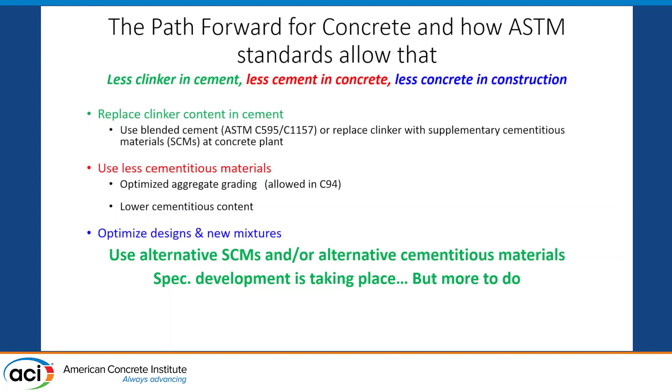We're getting a lot more companies, such as these new development companies. At the last ASTM meeting in June in Denver, we had at least 6 startup companies show up saying, how can we get into the ASTM process? Some of them are producing alternative cements, some are producing supplementary cementitious materials, some of them maybe both. So we're working on a strategy at ASTM to see how we can help get these people started in the ASTM process of getting specifications move forward.

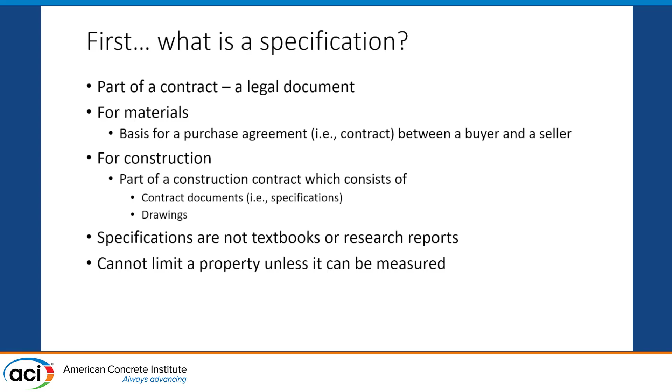But first, what is a spec? A specification is part of a contract. It's a legal document, a purchaser agreement between the supplier and the purchaser of that product. And for materials, the basis is a purchase agreement. For construction, typically specifications are part of a contract document for allowed construction. Specifications are not textbooks or research reports. They're a contract document for purchase. And you can't limit a property unless it can be measured.

So we talk about performance and prescription. And one of the things we're doing is trying to move towards more performance-based specifications for materials. That's why I've got this slide up there. Traditionally, a lot of the specifications have been prescriptive, so it has to be these materials and these proportions, as opposed to what are you trying to get out of the product? What are your performance parameters?

Now, often they're a mix. If you look at ASTM C150, there's setting time requirements, strength requirements, but there's also compositional limits, for example. And it implies that all materials that meet those minimum limits in the standard are the same when they're prescriptive. So if we don't put the compositional limits in and we just specify performance, we can open up the doors a bit. We have a performance specification for hydraulic cements, C1157.

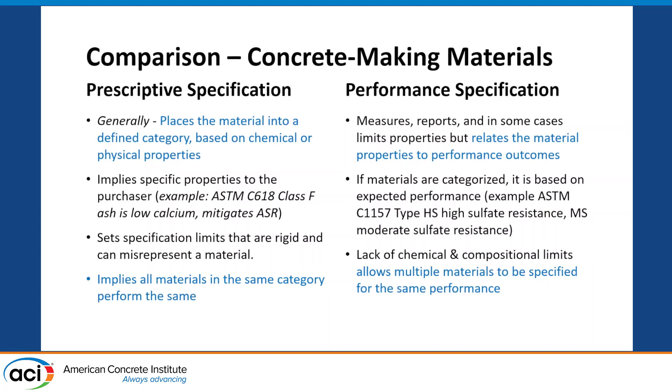It's been there since 1992. I think there's less than 5 states that have adopted it in the last 30 years. Because for some reason, people like to talk about performance, but they don't trust performance. Or they want to be the cooks in the kitchen, tell you how to make it as well.

But as we move, just remember that if people think standards development is slow, it's a consensus-based process. It's not the same as many other parts of the world where you don't have consensus processes. So you've got many people coming from different viewpoints, and they all have to come together to agree on something together.

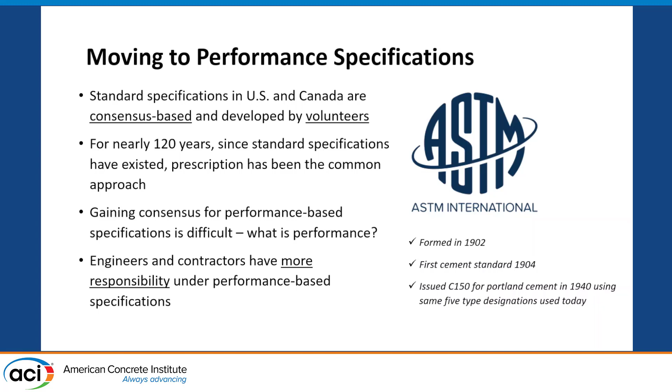And it changes roles and responsibility performance towards the engineering team. So they have to know what performance they're looking for, and often people haven't thought that through in detail. So we can meet a lot of the 2030 goals for reduction in global warming potential by just doing things that are allowed now in the standard. Without making any changes whatsoever, we can do these things.

We have Portland limestone cements with up to 15% ground limestone that offer about a 10% reduction in CO2 just by utilizing them.

They were intended to be equal performance to the base clinker for the type 1-2 cement they were replacing, not equal performance to every other cement. They were supposed to be equal in performance to the cement from the same clinker from the same factory.

So if you're going to buy cement, some issues have been evolving with Portland limestone cement, which seems unique to certain parts of this country and not others, where people are buying from multiple sources. It may not be that there are issues, but in Canada we've been using Portland limestone cements, and we're at 100% now. There was never any issue with adopting and using them.

So that's a 10% reduction. You can also increase the level of SCMs. Fly ashes and slags have been used for years, but typically at lower replacement levels. A lot of DOTs limit the maximum SCM level to amounts that don't allow you to optimize and reduce further, but you're getting a direct reduction in proportion to what you're replacing with the clinker.

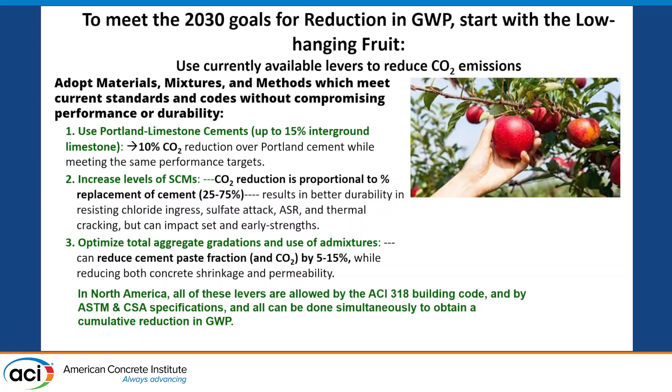For example, C595, the blended cement spec, is where the type 1L cements ended up. There's also a type 1T, which is limestone plus an SCM such as fly ash or slag, allowing you to blend these materials. And as I said, C94 allows optimized aggregate gradations.

Last month, apparently, Portland limestone cement is now 54% of U.S. production of cement type. And right now, in certain parts of Ontario, I can't speak for all of Canada, it's 100%.

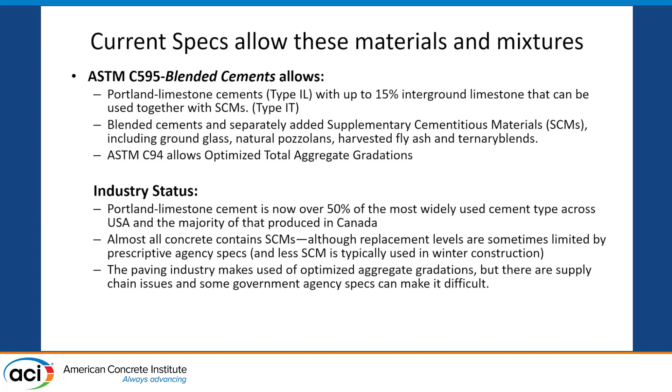All concrete contains SCMs pretty much, but as I said, some are restricted by prescriptive agency specifications, which are often legacy type specifications. And not many people do the aggregate optimization, even though it's fairly easy. This is a cartoon from the Cement Association of Canada report, showing that just using a limestone cement with either a moderate amount of fly ash or slag, you can get down into the 50% reduction range.

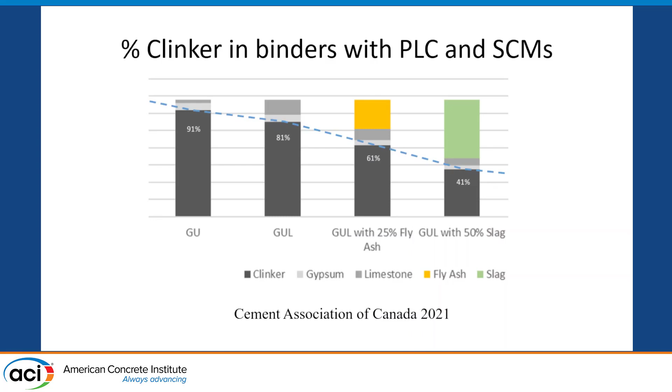Now Mary mentioned this earlier: what's the availability of materials? This is something Karen Scrivener at EPFL has been pushing, that on a global scale, when we're trying to make an impact, fly ash and slag are relatively small in availability in proportion to the Portland cement being produced. About 50% of that Portland cement is from China.

China seems to have peaked now, but India is growing, and they're probably going to double their cement production in the next decade. Africa is rapidly developing as well. So what's available for these people if we're not going to have more coal-burning power plants, and blast furnaces are being converted into electric arc furnaces, so the amount of blast furnace slag will reduce in availability over time. You can do all these things people talk about, but they're relatively small proportions.

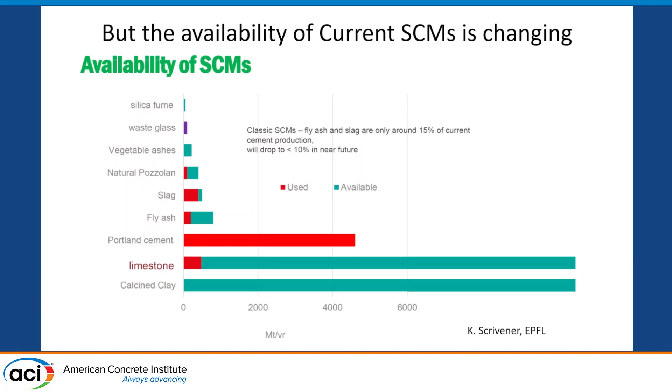So what's available is raw limestone and clay that can be calcined. It doesn't have to be high-quality clay, just calcined and blended together, and you can replace, as Mary showed, 50% of the cement - same graphic she showed - 50% less clinker, about 40% less CO2, just using a different pozzolan. A calcined clay is already allowed and already used in concrete in North America, but typically the high-purity metakaolins. Now there are companies making these lower-grade versions.

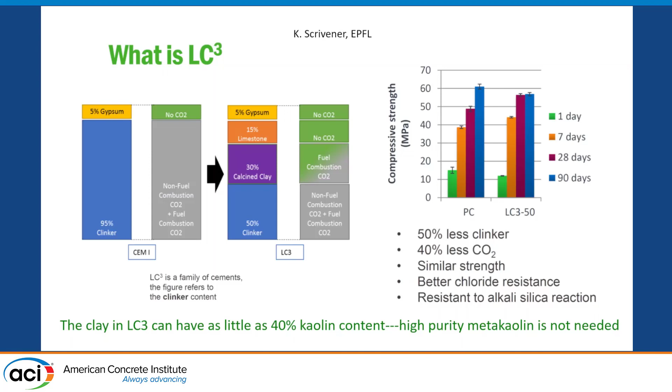I think Ash Grove has a plant now in Nebraska, and I understand that Holcim is doing that in Utah now, calcining clays. And then they can blend that with the limestone cement and make a 1T cement that is allowed now under the standards on 595. You can get similar strength performance, better resistance to ingress, and resistance to other types of degradation mechanisms. And you don't need the high purity material. You can use the stuff that the China clay people in the pharmaceutical industry throw away as waste, as the raw material.

So where are the standards barriers with something like that? Because there's been a lot of play about LC3. Everybody's excited about it. I get calls saying, where can I get some LC3? And the point is right now you can't.

But it's happening fairly quickly in various parts of the world. They seem to have good properties. The availability is good, which is why it's great, especially in the developing part of the world. India and Africa have a lot of clay materials, more clay than limestone. So there's some opportunities there.

Currently, the standards allow cements with up to 15% limestone that can be used together with an SCM. So you could essentially make an LC3 today under the current standards. We wouldn't have to change anything. But while a lot of the DOTs have adopted 1L cements, they haven't adopted 1T cements. They say 595 1L cements, but they don't adopt 595 blanket.

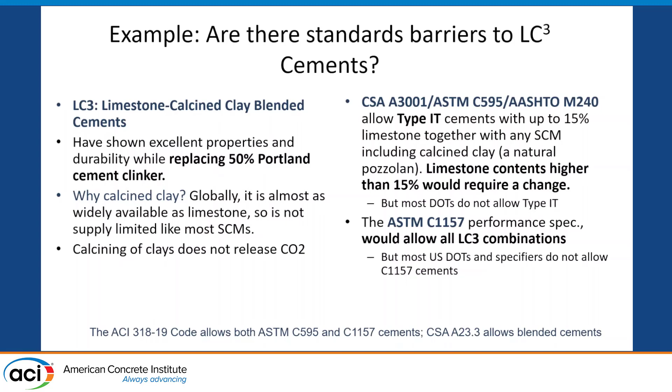Now, the 1157 performance spec, as I've mentioned, been there for the last 30 years, would allow all these things because there's no compositional requirements. You just measure performance, but people aren't speccing it. So there's some limitations there.

So we need to learn how to use performance specifications. We either trust performance or we don't. And this is the 1157 scope.

Performance spec covers hydraulic cements for both general and special applications. There's no restrictions on composition of the cement or its constituents. You just define what's the performance you're looking for, setting time, strength, volume, stability, those things. And you'd think people would use this, but they don't.

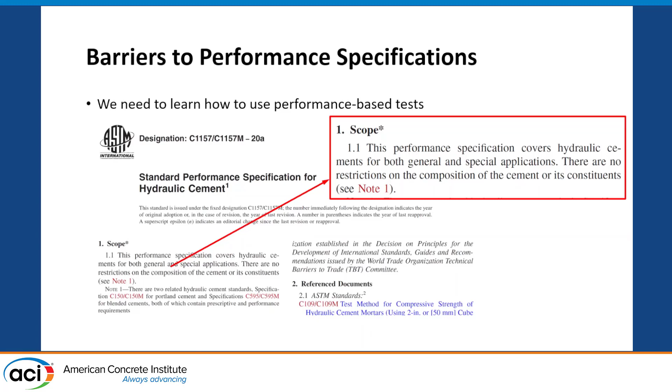As I said, only very few people have adopted it. People want performance, but for some reason they also want to know what's in it. But he's a chef. This guy wants more sand in his mix.

So a lot of the stuff on prescriptive is because of legacy specifications that have been developed over 100 years before the use of SCMs, just based on Portland cement, water, and aggregates. They have not considered the fact that concrete technologies moved on with SCMs and chemical admixtures of various types that can drive performance.

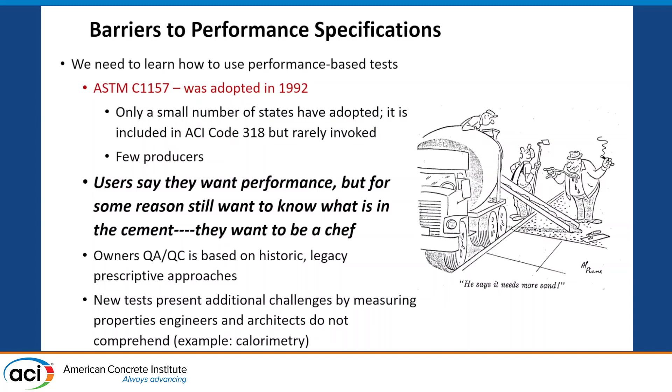So we're developing new tests, but some of the things people don't understand or don't want to take on.

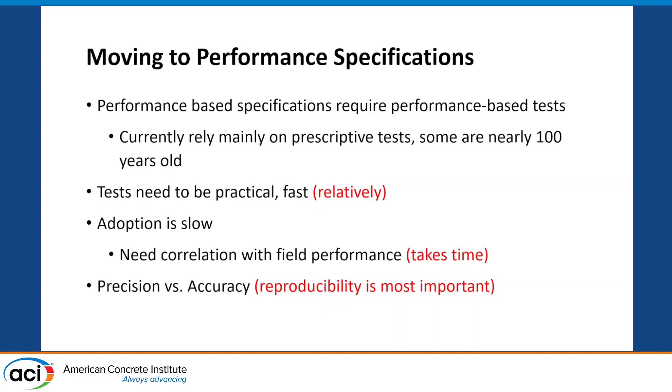Performance specifications require performance tests. Many rely on prescriptive tests. Some are pretty old. Tests need to be practical to be in a spec because you want to do them in a reasonable time frame. And we need to correlate with field performance, as Mary mentioned, and it takes time. And we need reproducibility and accurate test methods.

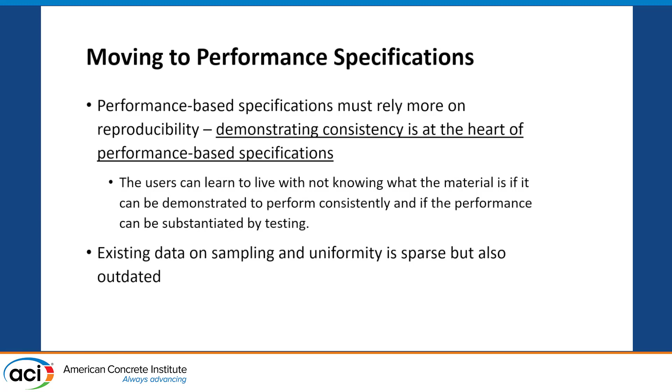So, I mean, I'm playing up to the ASTM part of this story, why it takes some time to do this. And we've got to have consistent product. You can use any product in concrete as long as it doesn't change every day. It's got to be consistent. And so we need some data on consistency.

So we've had some recent successes, though, and Mary mentioned harvested fly ash. I was involved with getting the standard changed in North America, Canada, and the U.S. on allowing harvested coal ash, because the number of coal plants has significantly reduced. But there's almost 2 billion tons of coal ash in landfills around the United States at over 500 sites. Now, some of it's pure fly ash, some of it's intermingled with bottom ash, but it can all be processed. It's exactly the same material.

Now, Mary mentioned that some of it was waste, wasn't used because it was not quality. That's not the case in 90% of the cases. The stuff is, there was just no market for it at the time it was put in the landfill. They were producing more ash than there was a market for.

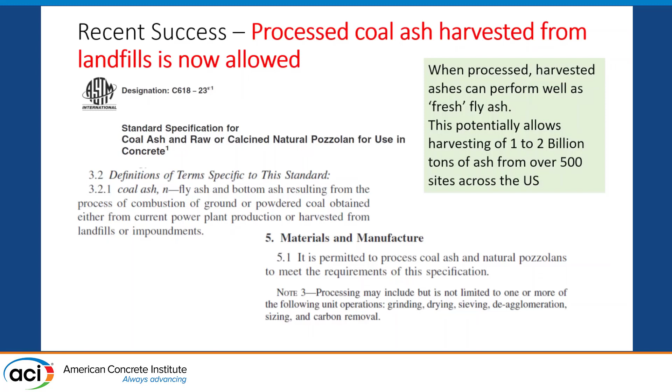So a lot of the stuff in the landfill is actually better quality than a lot of the existing plants are producing now because of the environmental controls that have been put on coal-fired power plants over the last 20 years. Low NOx burners, low SOx requirements, and mercury scrubbing. So a lot of the ash in the landfills is better quality to start with. You just have to get it out of the ground and process it to reduce the moisture and de-agglomerate it. And companies have been doing that, and now the specs allow it. Since June of last year, that's been allowed.

One of the issues with new materials that are coming on the market, alternative SCMs or different SCMs, is what are the reactivity?

How do you tell? A lot of the specs we have, like C618 for fly ash and natural pozzolans, use a strength activity test that, although it's okay with fly ash because we have a history of using fly ash and we sort of know what it does, I can take ground sand and make it pass the strength activity test in 618. That's not a very ringing endorsement for the reactivity of it.

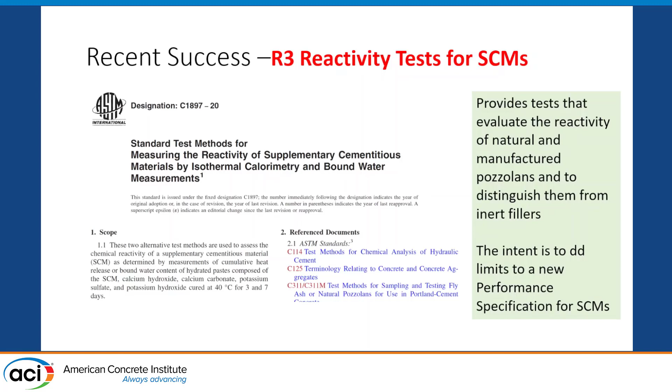So we developed a reactivity test as part of a RILEM committee I was involved with, and I championed this through the ASTM system to get this reactivity test, the so-called R3 test, using isothermal calorimetry as one method and just bound water measurements as another, to evaluate whether pozzolans are actually reacting. We have a standard for it, which we're hoping to incorporate in a performance spec for SCMs.

We got the ground glass pozzolan standard in 2020, which allows municipal waste glass recycling operations to process and grind the glass and make it into a pozzolan. There are about 3 or 4 plants in the U.S. operating now, but the total capacity is still under 1 million tons, so it's not a huge quantity. And there are some issues with using it in terms of its high alkali content, in terms of ASR issues.

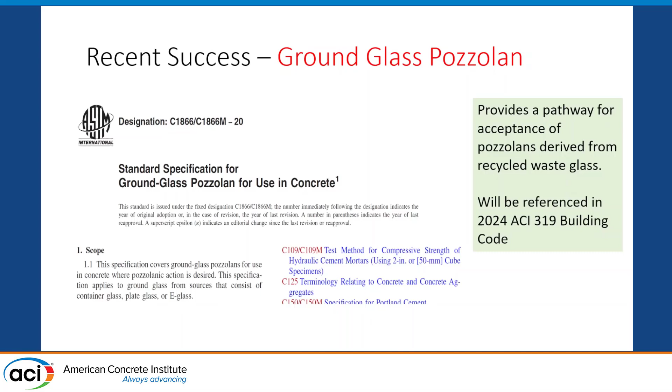One of the things we need is better performance tests, and something that has been developed with a number of people, and Larry Sutter got this through the system, was a foam index test. It's not a new test, but it was originally applied to evaluate loss on ignition and fly ashes. I chair a committee on performance of cementitious systems with chemical admixtures, looking at the whole binder, and this test can be used to evaluate whether you're going to have air entraining issues with a combination of your chemical admixtures and cementitious materials.

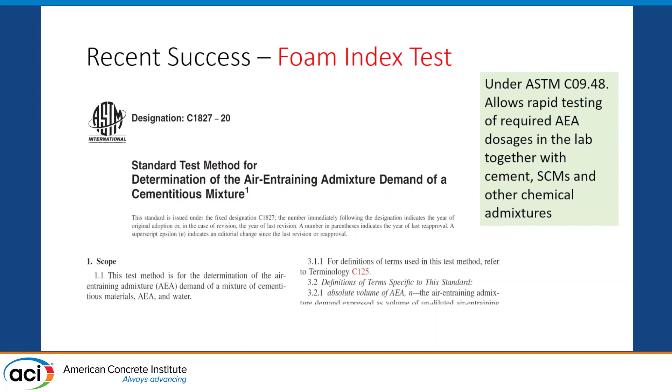And it's a quick and dirty test. You can find out whether you potentially have issues and how much extra air entrainer you might have to add to get the air content you're looking for, without waiting to put it in a truck and discover you don't have the air content. So it's a predictive test.

There's a brand new standard that just came out in the last couple of months, for cements that set by carbonation, to allow some of the materials that don't hydrate but set by carbonation. So they sequester carbon. There are a couple of companies out there, such as Solidia, that use a wollastonite type of calcium silicate, and then CO2 binds with it. It doesn't harden on its own; it hardens with the presence of CO2. And there are some other companies taking advantage of that too.

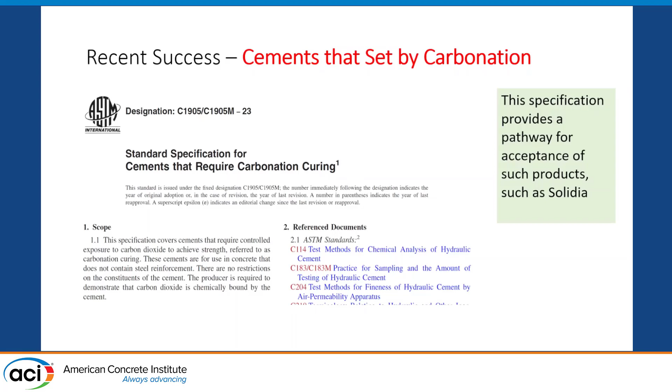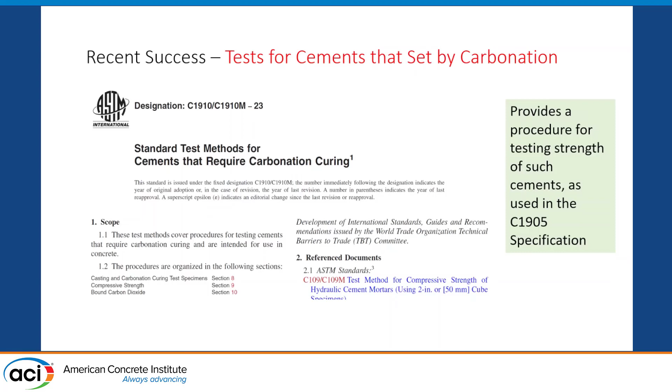There was a company, CarbiCrete, up in Montreal making masonry units with waste steel slag, just basically taking steel slag, making it into masonry units and carbonating it to get it to harden. It meets all the specs. And there's a test method that goes with that spec to evaluate how you measure the strength, whether it's going to get hard or not, and how strong it's going to get. So it's tied into that specification. That's all happened in the last couple of months.

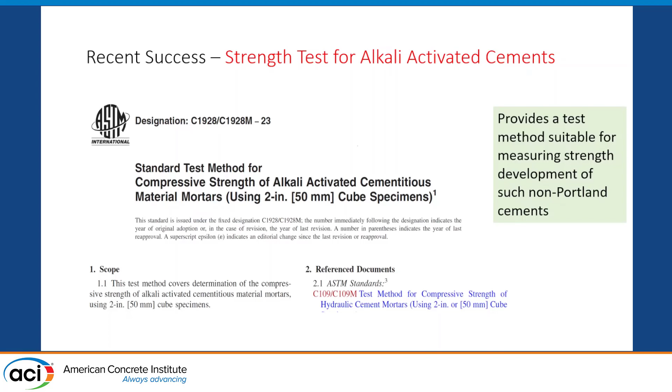There's a test that just came out this year on strength of alkali-activated cementitious systems. Again, for the cement side, basically using the same 2-inch cubes that people use for other acceptance tests, but it's been modified to allow them to test these alkali-activated systems. There's a lot of things that still need to be done.

We were just talking about colloidal silica today in the hallway, sorry.

We're working to develop, to modify an existing standard, C1697, for blended SCM. So you could take a fly ash and a slag or a different pozzolan, two different materials, put them together and meet it. But right now it says each one of those individual materials in your blend has to meet a standard on its own. So if you had a fly ash that didn't meet one requirement, say the fineness or loss on ignition, you couldn't use it in that standard as a blend. We're trying to change that, open it up so the final product meets the spec, not the individual ingredients. And that will open it up to more accessible use of a number of materials.

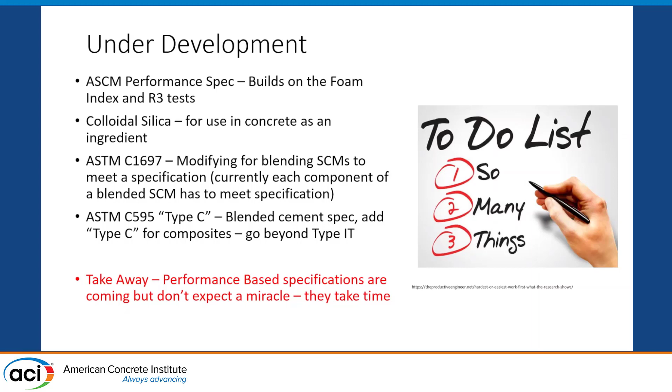We're trying to look at composite cements under C595. We're also looking at a performance spec for supplementary cementitious materials, and again I'm trying to use this reactivity test we talked about, the foam index test, some of these things to evaluate these new materials as a performance evaluation, as opposed to saying what's in it compositionally. That was the one I mentioned before, where each one of the raw materials in that spec has to be ASTM compliant on its own, and that causes some restrictions on evaluating materials that could be used.

One of the issues that would also be an issue if you're trying to make a blended limestone clay system, like what I would call an LC2, to replace 50% of your clinker with a blend of limestone and clay. Right now, that would not be allowed under this spec because limestone isn't defined as a supplementary cementitious material.

And that is an impediment. We want to fix that so it would allow this, because blended cements have been big in Europe and other parts of the world as single products. That's not been the history here in North America, with ready-mix plants doing SCMs as a separate addition at the ready-mix plant or at the precast plant. Having an LC2 spec would allow them to do the same thing as LC3, but added separately at the ready-mix plant. So we need to make a change that would allow that to happen. We're looking at that as well.

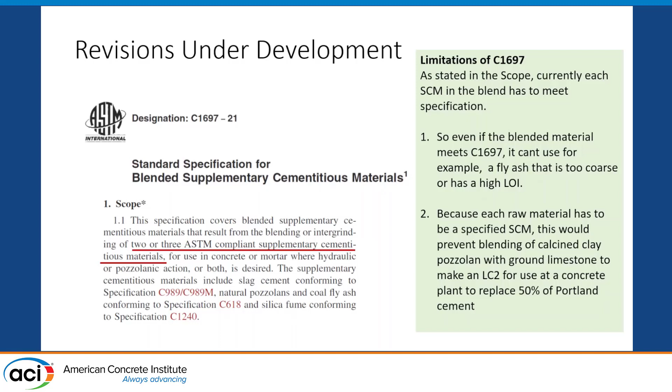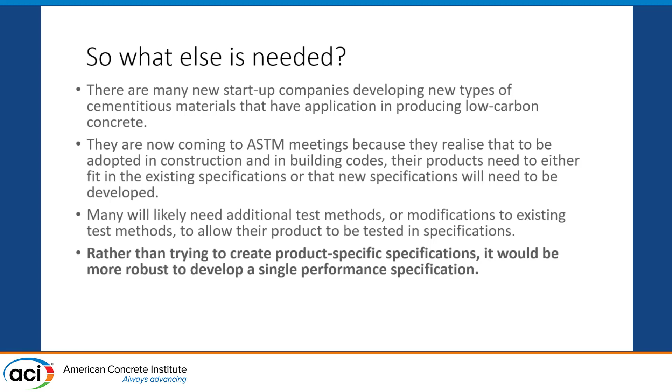One of the things I'm going to mention is these new materials have to fit into the existing infrastructure. The concrete industry has ready-mix plants, precast plants, you've got to be able to transport the material into a plant, put it through a mixing plant, put it into transportation units such as ready-mix trucks, and place it at a job site. So that infrastructure exists, and nobody's going to build a new infrastructure for a material that doesn't fit that bill. So it has to fit into that existing infrastructure for all that part of the system.

Some of the new startups are great, interesting products developed by bright people, but they haven't thought that through. That became apparent last year in the MnROAD test site that Larry Sutter helped organize, where on I-94 northwest of Minneapolis they placed test sections on the interstate. Some of the materials, one of them couldn't get out of the tote bags into the ready mix. One of them started to set up in the ready mix. One of them started to set up as they were trying to place it, so they had to rip it up, because these people had never tested it in practice in the field. They'd only ever done it in the lab or at small scale, so they hadn't taken it through the system, scaled it up to the applications and things that happen in the field. So we want to accommodate people, but the people developing these products have to realize they have to fit into the existing infrastructure to be used.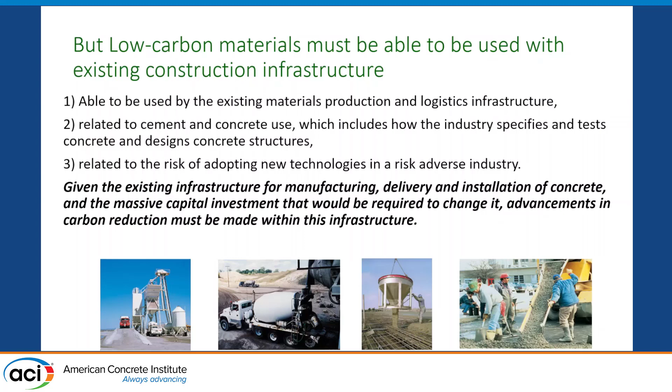We're trying to evolve the standards as fast as we can, and we're trying to respond to the needs of the community as they change. But there's always resistance to change. We never see resistance to change here, do we? And if you have a new product and something goes wrong, everything gets blamed on the new product. I've seen it four or five times with changes in materials over my career. You always blame the new material for anything that ever went wrong. It doesn't matter what the reason is, the new material gets blamed because it's easy to point to. So we need to make changes.

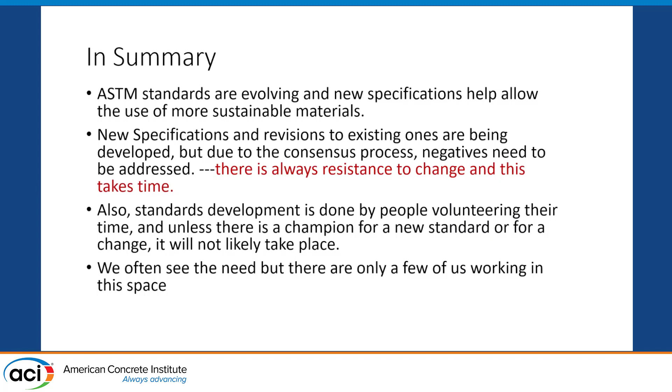There's only a few of us working in this space. I'm a recovering academic, and so is Larry, but very few academics show up at ASTM on our cement and concrete committees because they find it boring. It's not exciting, it's not research in the lab doing students, it's taking the process through to something that can be used commercially. They usually lose interest after a couple of meetings because it seems pedantic and boring, but it's a basis of trade and contract agreements, so that's important if you want to see your product used. Thanks for that, we're working like beavers as fast as we can, and we welcome your participation in that process. Thank you.